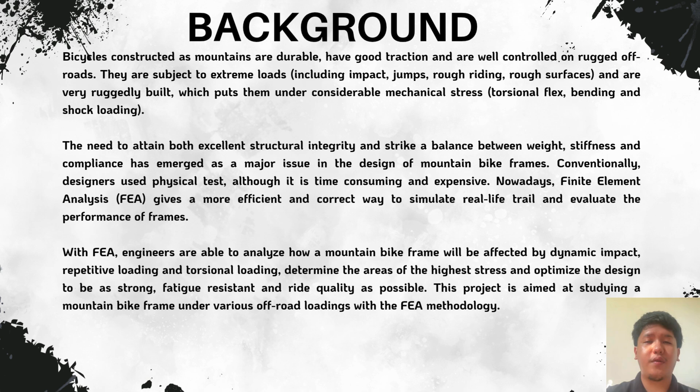Conventionally, designers use physical tests, although it is time consuming and expensive. Nowadays, finite element analysis (FEA) gives a more efficient and correct way to simulate real-life terrain and evaluate the performance of frames. With FEA, engineers are able to analyze how a mountain bike frame will be affected by dynamic impact, repetitive loading and torsional loading, determine the area of highest stress and optimize the design to be as strong, fatigue resistant and ride quality as possible. This project is aimed at studying a mountain bike frame under various off-road loading with FEA methodology.

For problem statement, mountain bicycles are designed to be durable, controllable off-road bicycles. They have tough loading conditions of trail drops, rock hits and uneven terrain torsional loads when used. Poor frame design provides too much flex, fatigue breakdown, low stability or even major structural damage. The design based on trial and error approach is ineffective and may not provide accurate estimation on trail stress in the real world. Hence, such a methodological pattern as finite element analysis (FEA) will play an essential role in simulating the structural behavior of the frame in relation to real off-road conditions.

This project addresses the need to analyze a mountain bike frame using FEA to identify critical stress regions, assess deformation, and ensure that the frame design meets both safety and performance standards.

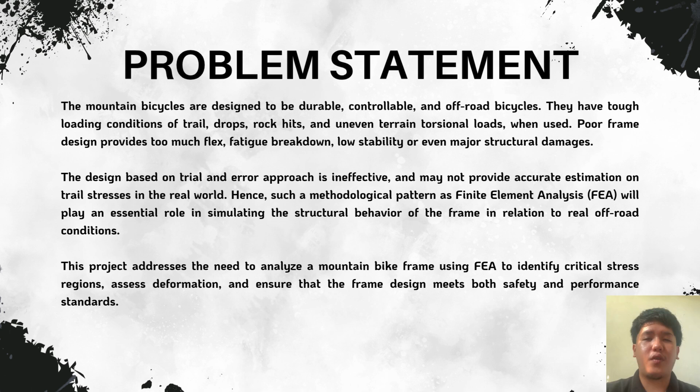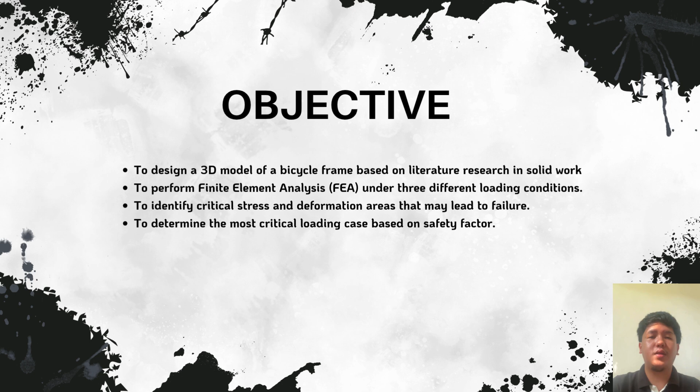For objectives: first, to design a 3D model of a bicycle frame based on literature research in SolidWorks. Second, to perform finite element analysis (FEA) under 3 different loading conditions. Third, to identify critical stress and deformation areas that may lead to failure. Last, to determine the most critical loading case based on safety factor.

For scope, this research focuses on modeling and analyzing a bicycle frame using SolidWorks and ANSYS. They create a detailed 3D model in SolidWorks 2019, selecting aluminum alloy 6061 for its strength and weldability. The SolidWorks model was then imported into ANSYS for static structural analysis under 5 different loading conditions, such as static start-up, rear wheel braking, steady-state pedaling, vertical impact, and horizontal impact.

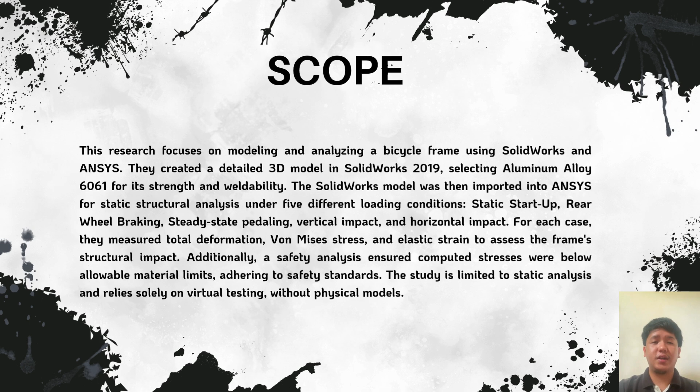For each case, they measured total deformation, von Mises stress, and elastic strain to assess the frame's structural impact. Additionally, the safety analysis ensured the computed stresses were below allowable material limits, adhering to safety standards. The study is limited to static analysis and relies solely on virtual testing without physical models.

For methodology, the first tool we use is SolidWorks. SolidWorks is a powerful 3D CAD software used by engineers and designers for product design, simulation and management. It offers tools for mechanical design, product simulation, data management, and technical communication, helping users develop products from concept to production. Its intuitive interface makes it a popular choice across various industries.

The second one is ANSYS. ANSYS is a multinational company providing engineering simulation software (CAE) tools. It allows engineers to create virtual prototypes and simulate designs under real-world conditions, analyzing structural, fluid, electromagnetic, and multiphysics behavior. This optimized design reduces physical prototypes, accelerates development, and improves product reliability.

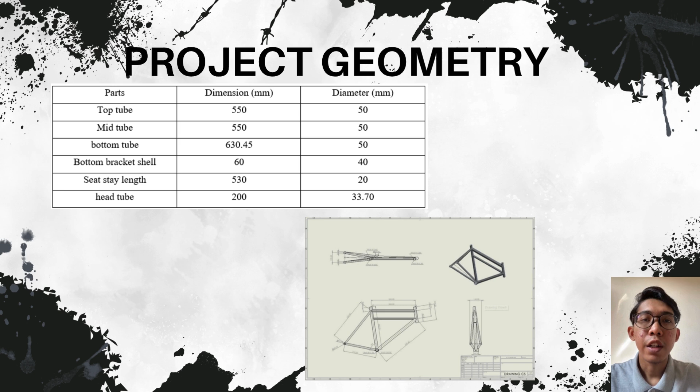Assalamualaikum, I am Asfar and I want to talk about our project geometry. For the top tube, the dimension is 550 mm and the diameter is 50 mm. For the mid tube, the dimension is 550 mm and the diameter is 50 mm. For the bottom tube, the dimension is 630.45 mm and the diameter is 50 mm. For the bottom bracket shell, the dimension is 60 mm and the diameter is 40 mm. For the seat stay length, the dimension is 530 mm and the diameter is 20 mm. For the last part, the head tube, 200 mm for the dimension and 33.7 mm for the diameter.

For our material selection for this analysis, aluminium alloy 6061 T6 was chosen for the entire bicycle frame due to its balance of strength, weight, cost, weldability and corrosion resistance. Consistent with industry standards and the journal article, linear elasticity was assumed for the analysis, valid for typical service loads, and factors like temperature, corrosion and fatigue were excluded to align with the journal scope. Material properties were directly sourced from the ANSYS Engineering Data Library.

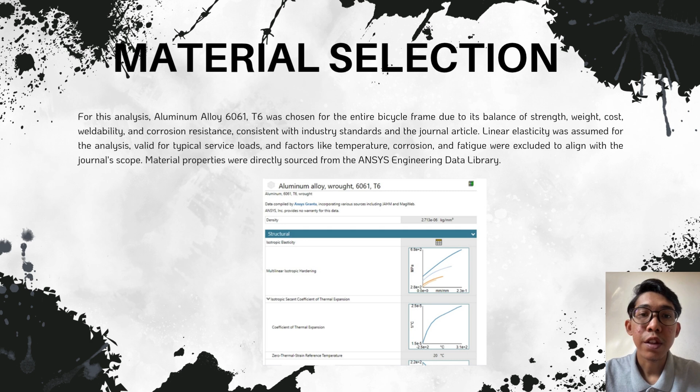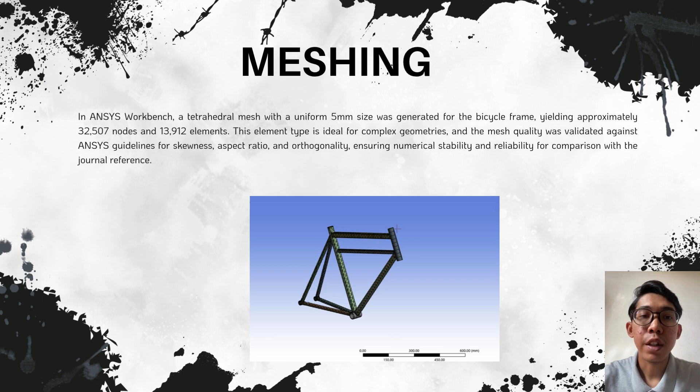For the meshing, in ANSYS Workbench, a tetrahedral mesh with a uniform 5 mm size was generated for the bicycle frame, yielding approximately 32,507 nodes and 13,912 elements. This element type is ideal for complex geometries, and the mesh quality was validated against ANSYS guidelines for skewness, aspect ratio, and orthogonality, ensuring numerical stability and reliability for comparison with the journal reference.

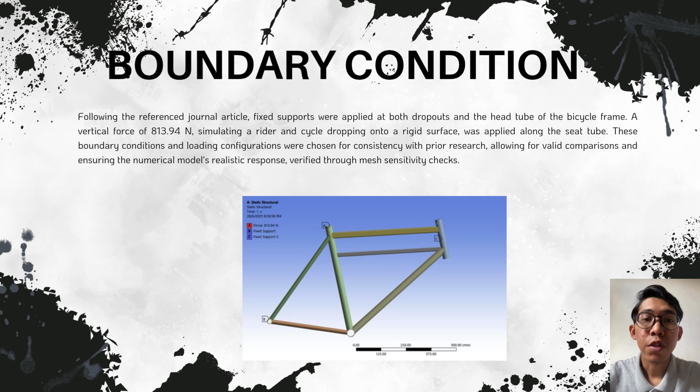For boundary conditions, following the reference journal article, fixed supports were applied at both dropouts and the head tube of the bicycle frame. A vertical force of 813.94 Newton, simulating a rider and cycle dropping onto a rigid surface, was applied along the seat tube. The boundary conditions and loading configurations were chosen for consistency with prior research, allowing for valid comparisons and ensuring the numerical model's realistic response, verified through mesh sensitivity checks.

So for the solution, following the static structural analysis, the maximum von Mises stress and its location were extracted from ANSYS Mechanical to identify potential yielding. Total deformation and stress contour plots were generated to visually represent structural response, pinpointing stress concentrations and critical deformation areas. These plots were then compared qualitatively and quantitatively with the reference journal article for validation.

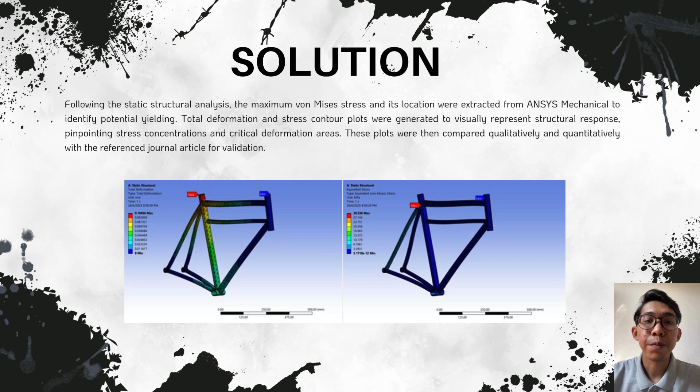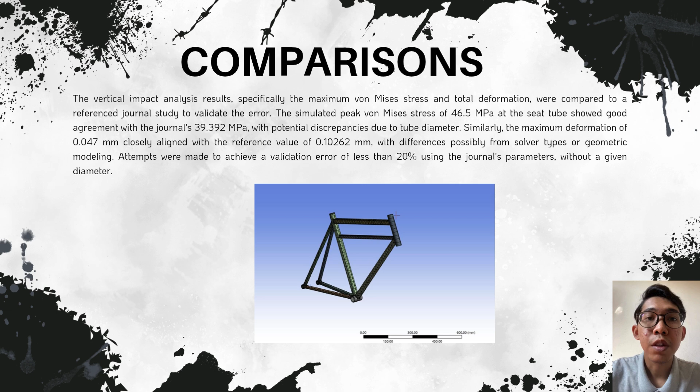So for the comparison, the vertical impact analysis results, specifically the maximum von Mises stress and total deformation, were compared to a reference journal study to validate the error. The simulated peak von Mises stress of 46.5 megapascal at the seat tube showed good agreement with the journal's 39.392 megapascal, with potential discrepancies due to tube diameter. Similarly, the maximum deformation of 0.047 mm closely aligned with the reference value of 0.10262 mm, with differences possibly from solver types or geometric modeling. Attempts were made to achieve a validation error of less than 20% using the journal's parameters without a given diameter.

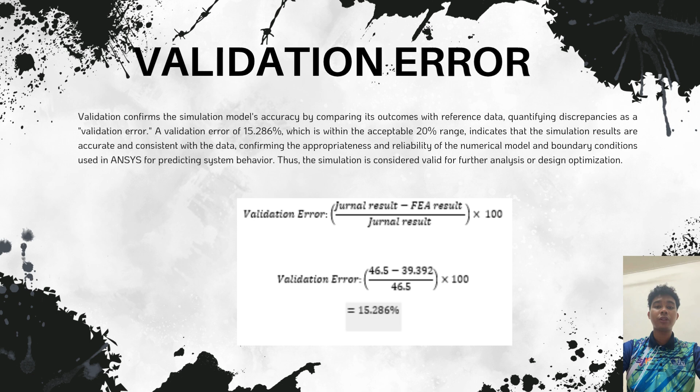So today I will explain about the validation error. Validation confirms the simulation model's accuracy by comparing its outcome with reference data. Quantifying discrepancies as a validation error of 15.286%, which is within the acceptable 20% range, indicates that the simulation results are accurate and consistent with the data. Confirming the appropriateness, reliability of the numerical model and boundary conditions used in ANSYS for predicting system behavior. Thus, the simulation is considered valid for further analysis or design optimization.

The verification error result is within the acceptable range, below 5%. This indicates that the numerical model has been implemented correctly and that the simulation is solving the governing equations accurately. The low error confirms that the mesh quality, solver settings, and numerical methods used are appropriate, ensuring the reliability of the computational setup.

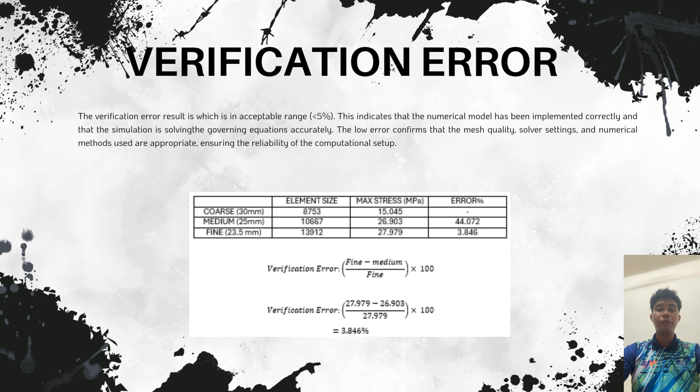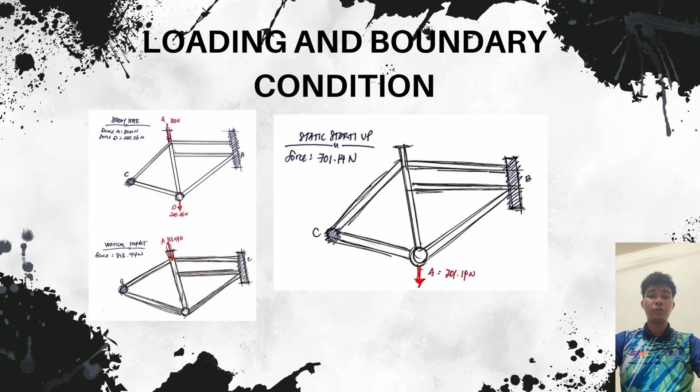Three different loading conditions were designed by each group member to determine the highest maximum stress, with the boundary conditions including steady-state pedaling, horizontal impact, and vertical impact, representing typical cycling scenarios. Steady-state pedaling simulated continuous riding force, while horizontal and vertical impact accounted for sudden obstacles or uneven terrain. By analyzing these conditions, the group aimed to identify the most critical stress points and ensure the structure's durability under varying loads. The findings from this analysis would not only highlight the most demanding loading condition, but also provide essential insights for optimizing the frame's design, material selection, and safety margins.

In the steady-state pedaling simulation, the bicycle frame is subjected to typical riding loads with its dropouts fixed. A 700 Newton downward force is applied at the bottom bracket for pedaling, and a 200.6 Newton force at the head tube for handlebar loading. The resulting moderate maximum stress of 30.358 MPa and deformation of 0.10456 mm indicate the frame's ability to withstand continuous pedaling, assessing its long-term durability under standard usage.

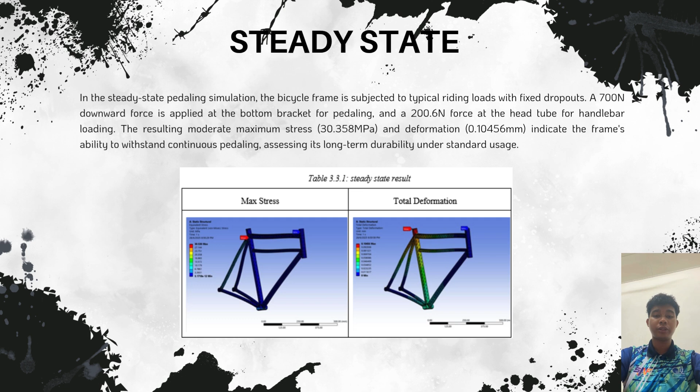The vertical impact test simulates landing force, fixing dropouts and the bottom of the head tube while applying a 813.94 Newton downward force at the seat tube. This scenario, while inducing stress, is less severe than horizontal impacts, which yield a max stress of 145.81 MPa and deformation of 6.3264 mm, indicating the frame's better absorption of vertical shocks. The results assess the seat stays and seat tube's ability to withstand hard landings without permanent deformation, suggesting the frame is more resistant to downward force. However, repeated vertical impacts can lead to fatigue failure, especially at welded joints and thin wall sections.

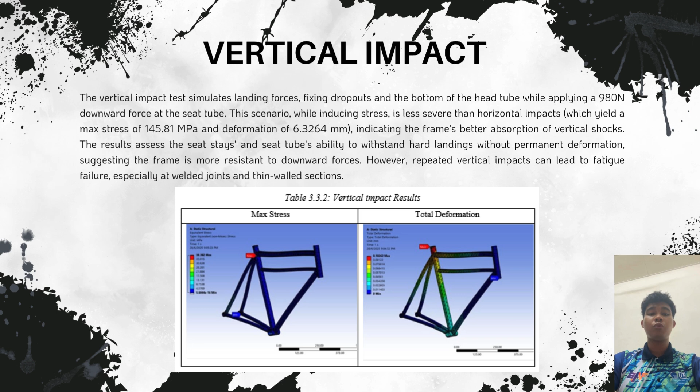To ensure consistency with a reference study, fixed supports were applied to the bicycle frame's dropouts and head tube. A static concentrated load of 200 Newton was applied at the bottom bracket and 701.4 Newton at the seat tube, simulating rider force during pedaling in a vertically equilibrium state.

These boundary conditions and loading configurations were chosen to align with the reference study, allowing any result deviations to be attributed to specific variables rather than boundary condition differences. Mesh sensitivity checks verified the numerical model's realistic response under these prescribed conditions.

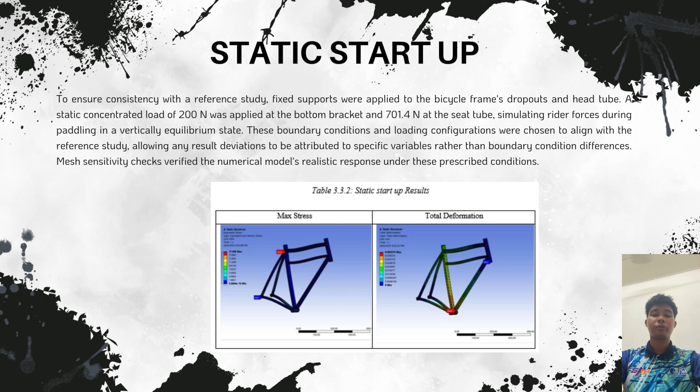The safety factor analysis presented in the table evaluates the structural integrity of a component under 3 different loading conditions: steady state, vertical impact, and static startup. The component material has a constant yield strength of 259.2 MPa, and the safety factor for each case is calculated by dividing this yield strength by the maximum von Mises stress experienced in each scenario.

Among the 3, the static start-up condition is the safest, with a safety factor of 14.523, indicating the component is significantly over-designed for this load.

The steady-state condition has a moderate safety factor of 8.488, also showing sufficient safety.

However, the vertical impact load results in the highest stress and the lowest safety factor of 6.580, suggesting it is the most critical loading condition and the one that most closely approaches the material strength limit.

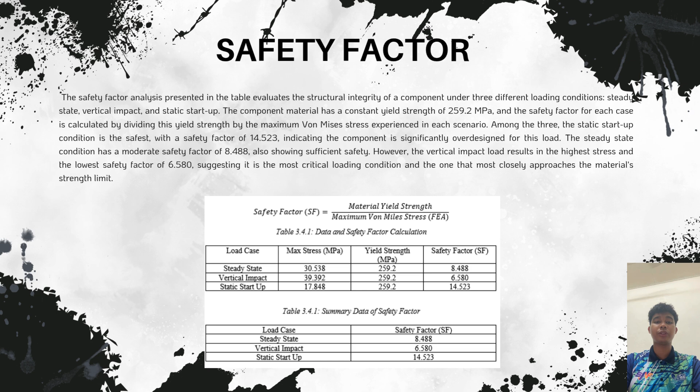Parameter change in the vertical impact is set on the seat tube because vertical impact on the seat tube has a lower safety factor than steady state and static startup.

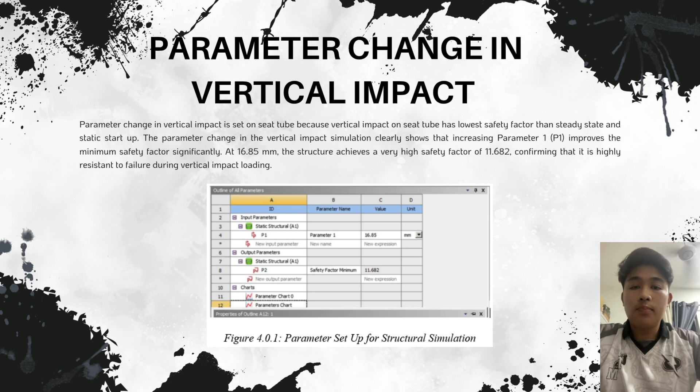The parameter change in the vertical impact simulation clearly shows that increasing parameter P1 improved the minimum safety factor significantly.

Figure 4.0.2 illustrates a parameter chart setup where the x-axis represents a design input, P1 is thickness, and the y-axis represents the minimum safety factor P2 under the vertical impact. This configuration allows for visual analysis of how changes in the input parameter affect the safety factor.

With the current simulation result, P1 is 16.85, P2 is 11.682. Such charts are vital for understanding the influence of design modification on safety performance.

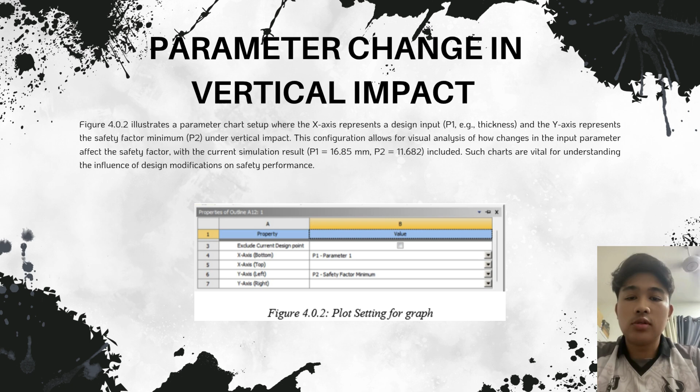Figure 4.0.3 represents a parametric analysis table showing how design input P1, from 13.5 mm to 16.85 mm, influences the minimum safety factor under vertical impact. The data demonstrate that increasing P1 significantly improves the safety factor, enhancing structural performance.

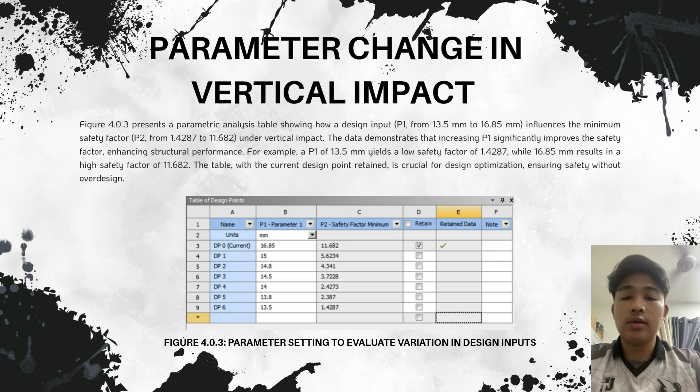For example, P1 of 13.5 mm yields a low safety factor of 1.4287, while 16.85 mm results in a high safety factor of 11.68. The table with the current design point retained is crucial for design optimization, ensuring safety without over-designing.

The graph shows the relationship between P1, the parameter in mm, on the x-axis and P2, the minimum safety factor, on the y-axis. The plot indicates that as parameter 1 increases from about 13.5 mm to 16.7 mm, the minimum safety factor rises sharply from just above 1 to over 12.

The upward trend is non-linear but consistently positive, suggesting that increasing P1 leads to a significant improvement in safety factor. This likely reflects a design sensitivity where increasing a critical dimension, thickness, or diameter greatly improves the structural safety, making the system more resistant to failure under load.

The chart implies that optimizing P1 is an effective strategy for achieving a higher safety margin.

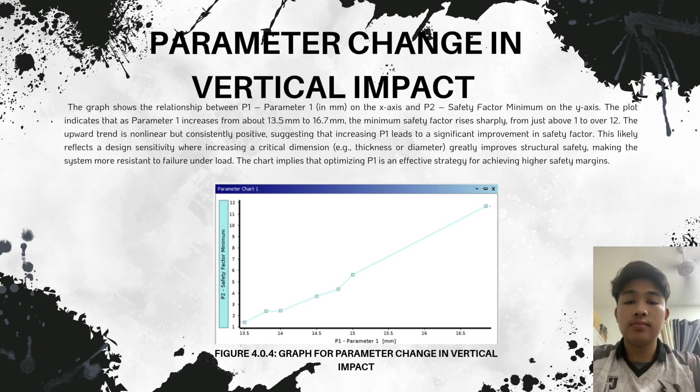For the conclusion, this finite element analysis successfully modeled and analyzed a 3D bicycle frame in SolidWorks and ANSYS under 3 load cases, accurately determining areas of maximum stress and total deformation to predict structural behavior at potential failure points using aluminum alloy

6061 for consistent material performance comparison. The FEA model's validation error of 15.286% indicates fair agreement with journal data, but a low verification error of 3.486% confirms the internal consistency and reliability of the numerical model and computational setup.

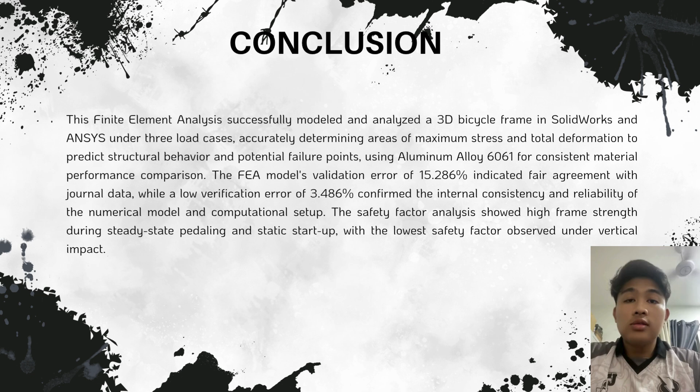The safety factor analysis shows high frame strength during steady state pedaling and static startup, with the lowest safety factor observed under vertical impact.

For recommendations based on this result, future work should aim at improving the FEA model to minimize the validation error further, which may involve more intensive experimental-based material property validation or more complicated joint behavior modeling.

It is also possible to consider using other aluminum alloys or composite materials that may have a reduced weight at the same or better structural strength, especially in the vertical impact case.

The possibility to investigate optimized frame geometries, particularly in the regions marked as having high stress concentration in case of impact loads, may also result in considerable design enhancement.